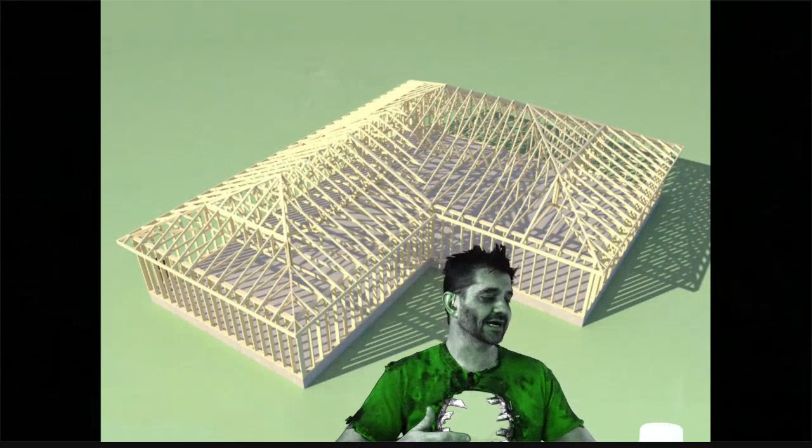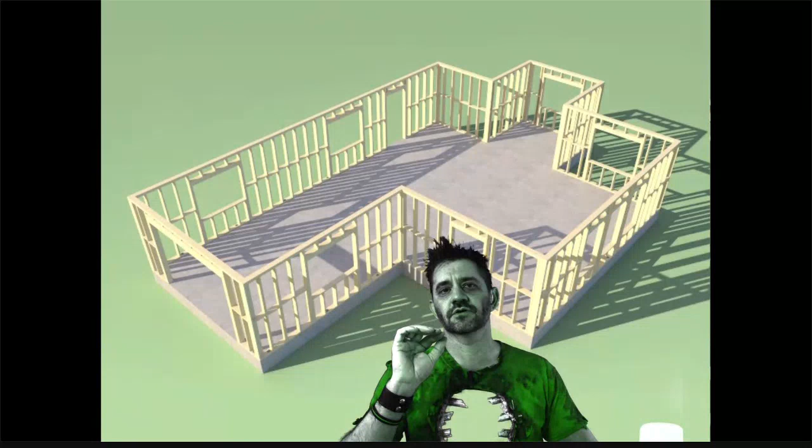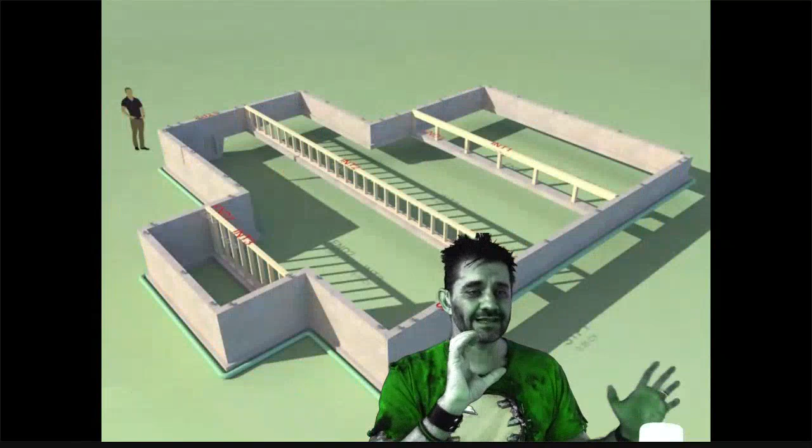Medeek is a series of extensions offered by Nathaniel Wilkerson, who I think is on here somewhere - say hi, Nathaniel. Medeek BIM is a super quick, super easy way to draw the framing members in your house. There's a truss extension, a wall extension, and a foundation extension that allow you to create the framing of your structure in just a few clicks rather than lots of clicks. This is something way beyond just downloading a component and dropping it in - this is an extension that goes in and frames all the stuff for you.

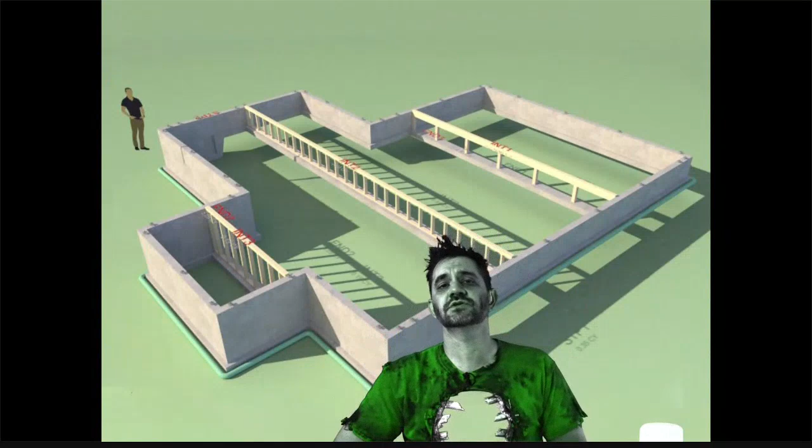I wonder if John Brock uses Medeek. What do you think? I know that those two get along quite well.

Speaking of awesome, you know who else is awesome? Our Fireside Chat SketchUppers who have joined us here tonight. What kind of costume did you have planned to wear for Halloween? If you're opting out, it's okay to say what you wanted to do this year, that's an acceptable presentation. I'm going to type mine in - I just put Negan again. It's about all I can do these days. Thanks to Jody for letting me borrow his squeaky jacket here. Can you hear this? Listen, can you hear that? I sound like a creaky door. Hopefully that's not my elbows actually making that sound. But Jody's going as Aang.

That'll be fun. Ooh, Indy, I love that, that's a solid one. Oh, got a Day of the Dead one, Nicole, that'll be good. Yes, some sugar skull makeup. I know, see this is the contradiction, right? We just asked you and more than half of you said you're not doing anything, and then we said, 'Oh cool, what are you dressing up as when you do nothing?' What had you planned on? Aubrey did Belle from Beauty and the Beast, right? Is that the right one? Yeah, very cool stuff. Not a lot of extensions, not a lot of costumes out there.

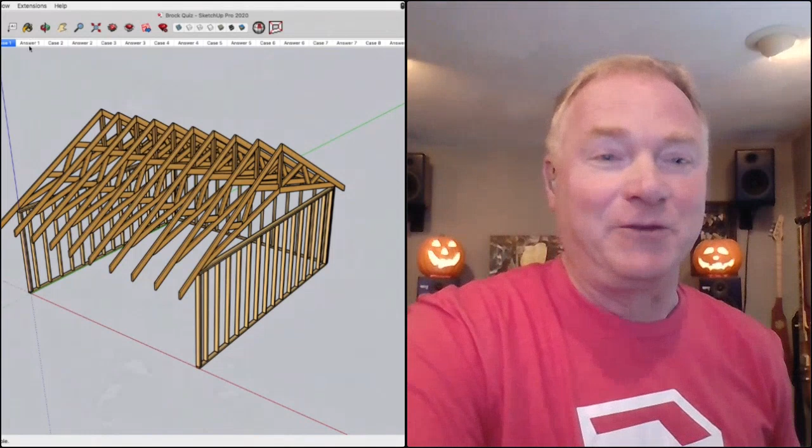All right, we're going to start with some trusses. So you see a model like this - what's the problem here, John? You're missing a sky hook - support from above, trusses. Yeah, that is correct. Trusses, in general, should have at least 2 bearing points. That's right, that's not going to work.

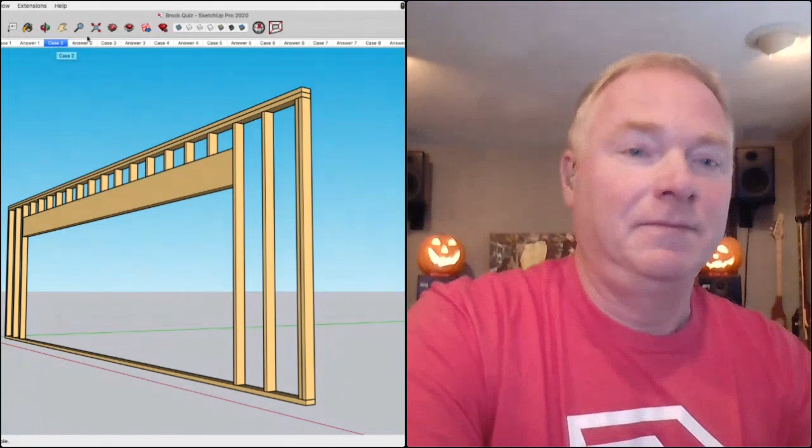Okay, moving forward. Here I got a nice big garage door header, about 16 feet across there. You see anything wrong with this issue? There are no jack studs. That is also correct. Much like trusses, it is good to have headers get supported as well.

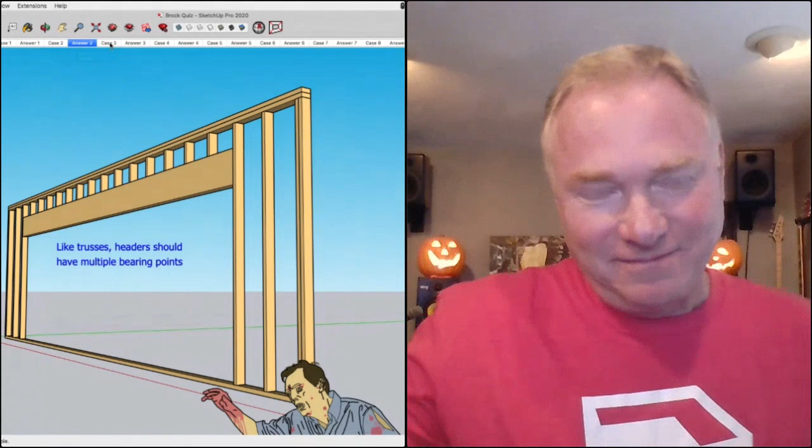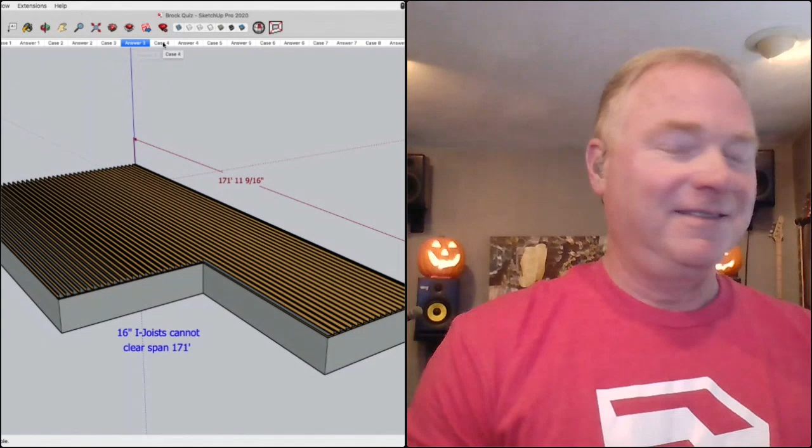Okay, moving springy, yes that's right. A couple people called that out as having no rim board. That would be an issue also, but my mind went to the span first. I would have a bigger issue with shipping that 171-foot I-joist probably before I worried about getting the rim joist on there.

All right, here we have a cantilever condition, and I wouldn't doubt if you've actually seen this because I've seen this in plans before. What's not good about this? If you flip that other way around, you got to be at least twice, if not 4 times, more in than you are out, and they've got it the other way around. That is absolutely correct. The back span should be at least twice the actual cantilever length.

I'm surprised that that is still a thing that gets called out by people. But all right.

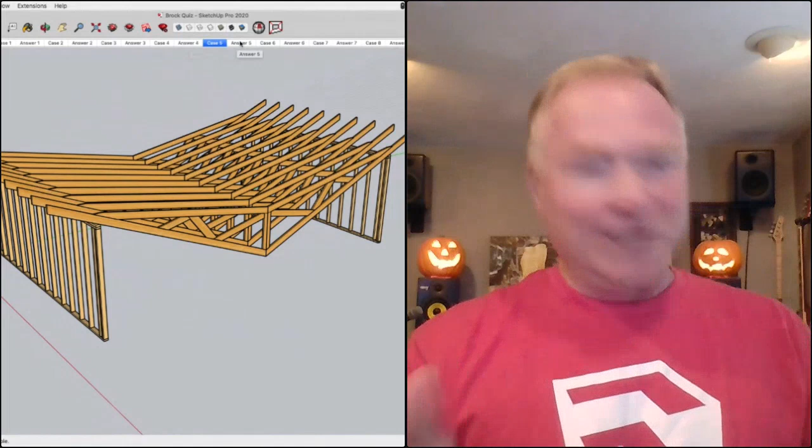That's what trusses look like when we used to install them before we had cranes. Literally, you'd set one up on either end of the plate like that, and you'd take a big long 2x4 with another 2x4 tacked to it, push it up to get it vertical, but they're upside down. That is right, the general rule of thumb I was taught with trusses is pointy side up. Nice, all right, you're doing good, I think you're 5 for 5 so far, John.

I'm sold on your deliverable, but let's grab a couple more questions and just see. Okay, here we have

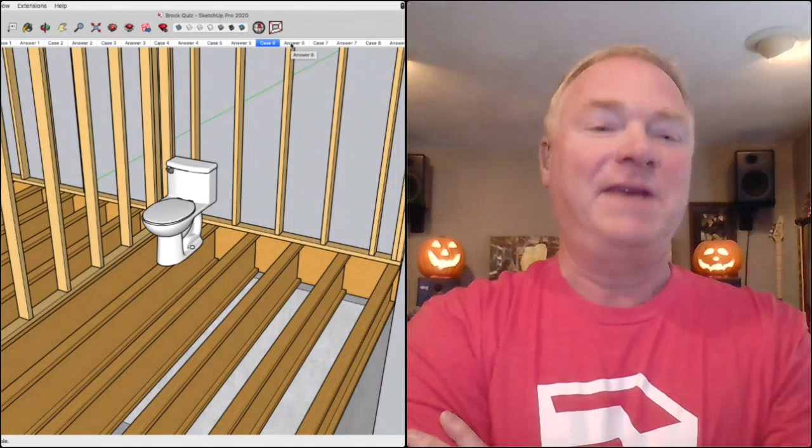What could be a potential issue for the plumber? What do you see here? You can't cut an I-joist or a truss if there's a toilet above it like that. It has to be headed off or engineered if you do any kind of cutting. So that is true. Also, you should put the toilet in after the sheathing and not before. Yeah, pretty much.

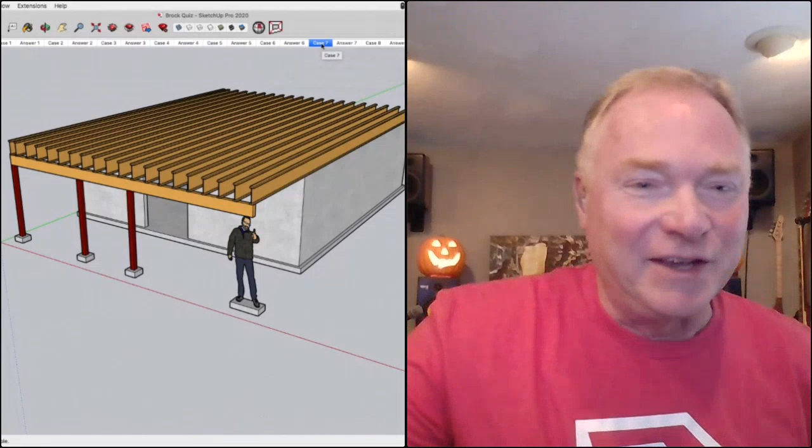All right, what is the problem with this floor system? Is that Guz trying to hold up the other end of that beam? That is right, I could do it for a little while. The problem is a Guz can only be used as interior bearing, he's not rated for exterior support. Mm-hmm, all right, and here we go.

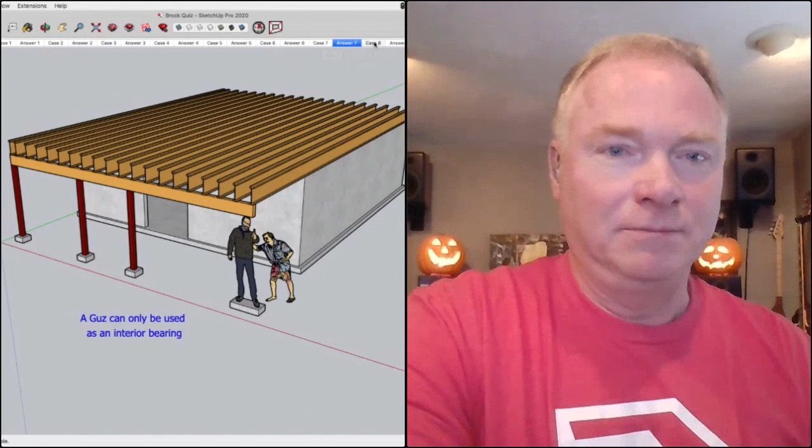This is going to be our 8th and final question. What is wrong with this structure? What is right with it? Boom! Everything is wrong. That is absolutely correct.

Well I gotta say, if I was looking for somebody to review my plans, you've proven it to me. You got the goods, I'm very happy with your answers. Excellent work. Good deal, well that was, you were 8 for 8. I'm very impressed, I'm not surprised though.

And I think we're getting ready to get into the big juicy part of this awesome presentation here. So first, before we do that, let's get some housekeeping out of the way.

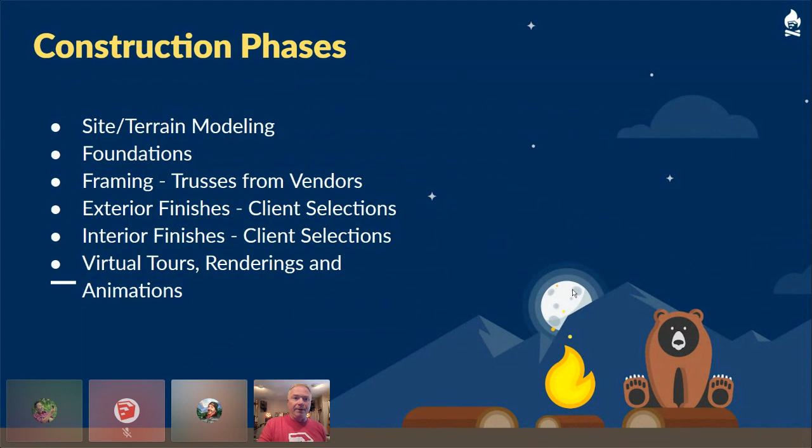Just a little aside, we were talking about the music thing. When COVID first hit—I play in a popular 80s band—everything shut down, all the venues shut down, all of our gigs were canceled, everything pushed into next year at that point. So it started during the quarantines: it was just me on my acoustic, and I'd post a song on Facebook every weekend or whatever. Then I finally started bringing some friends over, and it sort of took off to where past bandmates or current bandmates would come over and we'd do a song and put it on Facebook for everybody. And this one particular episode, a former bandmate wanted to do a Thin Lizzy song, The Boys Are Back in Town—it's his bucket list to sing a Thin Lizzy song in a pub in Ireland.

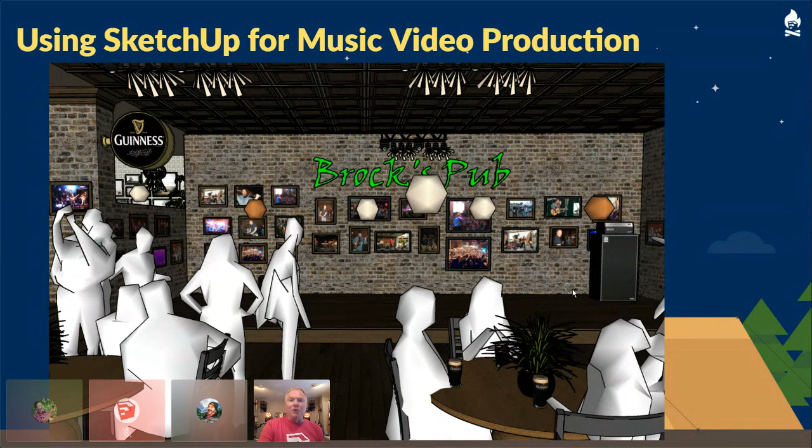So I thought, wouldn't it be cool to have a virtual stage and use our geek skills in SketchUp? So I reached out to my dear friend Dwayne Addy up in Canada, who is Irish, and said, you don't happen to have a pub model laying around, do you? Next morning he sends me this model with this most killer rendering photoreal—the Guinness bottle. So I dirtied it up, threw some brick on the wall and a bunch of photographs and stuff. And that Ampeg amp—Aaron's a bass player, by the way, do you see the Ampeg amp? And there's two Marshall amps on stage that I got off 3D Warehouse. Then I rendered it, did an animation coming in, but then green-screened us in there. So that's us with Brock's Pub.

That's awesome—so everybody came over at different times, that's how we work these things. My other drummer in the current band I'm in now, he'll send me his video and audio tracks, and then I just start building the song from there and having guys come over. It's Brockworks Music if you're interested in checking that out, how we use SketchUp and Inkscape to bring that to life.

It's worth checking out. It's definitely a fun thing to see. Yeah, it's fun. We've been having a blast with it.

So here's the workflow. Excuse me if my throat goes out, it hasn't been in the best shape the last couple days - having that Q-tip stuck up piercing my brain yesterday for a COVID test wasn't fun. All right, so the first thing we do is import our main floor plan.

We don't use a raster image for the floor plan - it needs to be vector-based, something we can snap to and measure. There are some free ways of doing it. I've tried everything under the sun, and finally found a developer to help me make PDF Importer. That's our plugin that's available, and what it does is import a vector-based PDF directly into SketchUp.

But you can also do it for free if you have Inkscape - you can open up that PDF and convert it to a CAD file. You could use Adobe Illustrator, which I used to pay all that money for just to open a PDF and export it as a DWG. That was the only reason I had it, so I saved money by switching to the PDF importer.

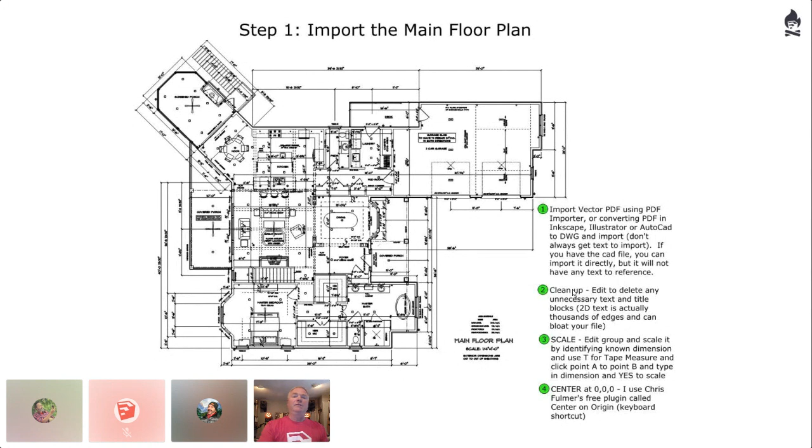I could just move it roughly, but I use Chris Fulmer's free plugin called Center on Origin - shout out to him. For me, it's Alt-C, which takes it and moves it right to the center, putting the floor plan at 0, 0, 0.

The next step is we create what us old carpenters call a storey pole, using guide points. I find a common corner - what you're seeing is a perspective view looking down. Find a common corner to each level in the house. In this case, I used a corner on the interior, on the rear of the house, then go up with a guide point.

That's right where the subfloor will be. I go up with a guide point to whatever the wall heights are, referring to your section drawings and elevations. In this case, 9 feet 1 1/8 up.

I go down 3/4 for subfloor, then down 9 1/4 because I've got a 2x10 band on the truss, mid-chord bearing truss. Then 1.5 inch sill plate, then down 10 feet for the bottom of the foundation, coming up 4 inches because I've got a 4-inch slab. And finally on the back of the house, they're 18-inch floor trusses.

They're mid-chord on the front, bottom chord on the back, so I'll come down 18 inches from under the subfloor for the floor trusses. And that gives me my story pole - that's where I know all the elevations need to work out to.

I've locked that in a group with the guide points, but we use guide points and guidelines constantly. Control G is our edit, delete guides shortcut, but that would delete these guides even though they were in a locked group. So I found a free plugin called Locked Guide Saver - I use that instead of edit, delete guides. My shortcut runs that script and deletes all the guides except what's in that locked group. That was pretty cool.

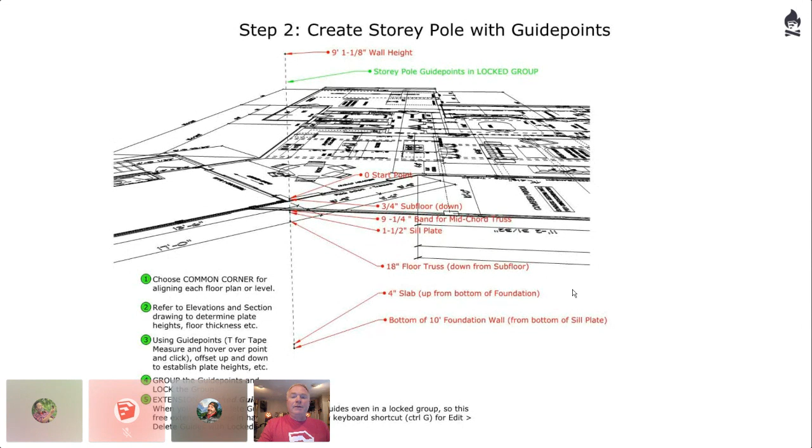All right, the next thing we do is import the other plans. I usually always do that in a clean file, because if you keep importing plans, it can really start bogging things down. So I'll go into a clean file and import it.

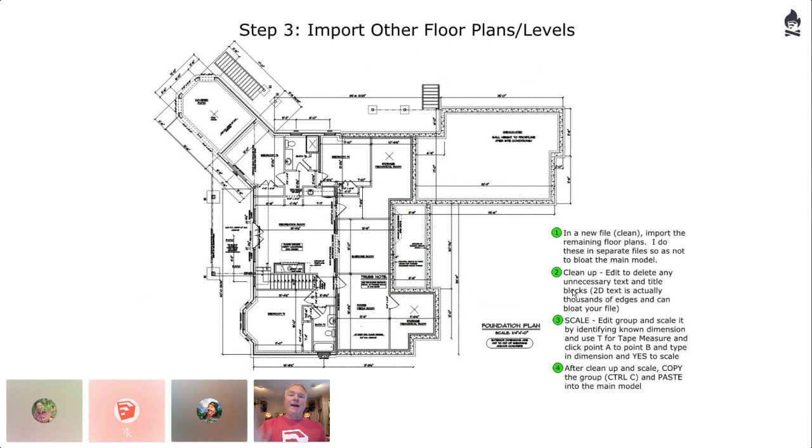In this case, I only had one other level, the lower level. I do the same process by cleaning it up, scaling it, and then I'll copy it and paste it into the main model and move it to where it's supposed to be on that level. In this case, it'd be on top of the slab, so I'll move it to that same exact corner.

And then I usually go top view, parallel projection, and go around the perimeter to make sure that the walls align. Because as Bob McCarter will tell you, there are times where the architect may move a wall on one level and forget to move it on another level. It's happened.

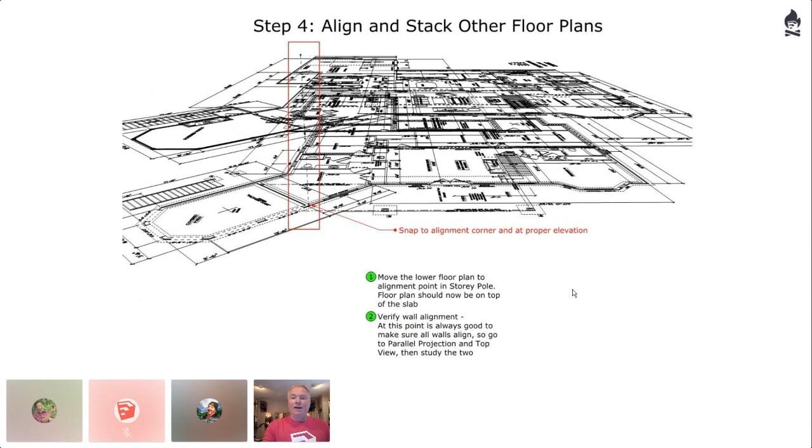So that's how we verify. That's how we got our stack.

Okay, so then it's kind of like what Nick showed with the contours. We work on our site plans and our site models because there's no sense in modeling a foundation with just a simple stepped footing for frost depth or whatever you're doing it for.

If you don't know how your terrain is, you may have some sub foundations to deal with.

So in this case, what you're seeing down here came from my surveyor. They send me a DWG or DXF that has the site or the 2D plat at the bottom. In our case, we're building on a lake where full pond is 795, or contours at 800 feet elevation, is what the property lines are at. The power company owns everything below that. So all these contours are floating 800 feet up above the ground.

Now I think in Nick's case it was like 6,000 feet or something, and so he moves them down. I generally, just to keep the math easy, keep them at 800, at least at first.

So what I do is you'll see, you want the site plan to have the house located. If it's got the driveway located, roads and stuff, you can actually trace those, use that to create faces that you can then drape on your site, which is really handy for sidewalks and things like that.

But you also want it to have the elevation specified for where the finished floor is going to be, whether it's the main floor, usually the slab elevation.

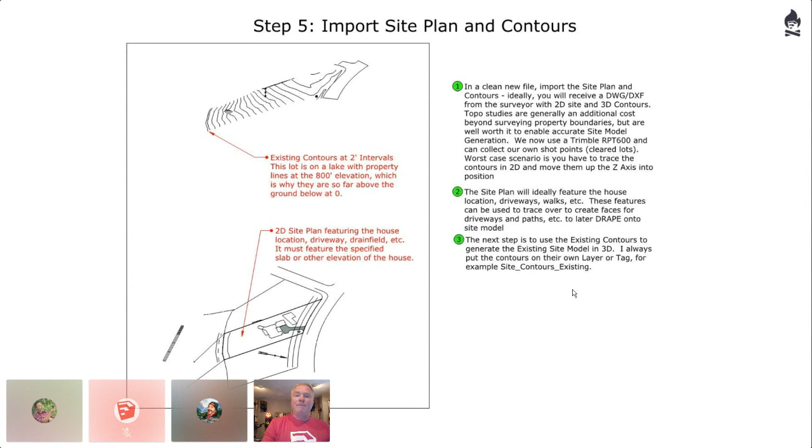So what you're seeing is these contours that are 2 feet apart, and they're just lines, right? So the first thing I have to do is actually make a site plan or site model, and it's got to be in 3D. It has to report as a volume, so it has to be a solid. You can't just do a mesh if you want to know what your cut and fill is going to be, which is very important to us.

So in this case I use Fredo's Topo Shaper, which is a free extension, but it doesn't make a solid right away. It'll put that skirt on there, but you have to actually edit it to make that a solid.

Lately I've been using Christina Eneroth's Terrain Volume, which is a free plugin. So you can use it from contours to take those contour lines to create the 3D mesh, and then run her script, and it makes a perfect solid chunk that reports a volume.

All right, so once I have that existing site modeled, it's important that I take the site into the main model and align it with the house, the main model. I don't align the house to fit on the site, because you want the house to stay in red and green axes, right? So what I do is I'll take that house you see down on the bottom here.

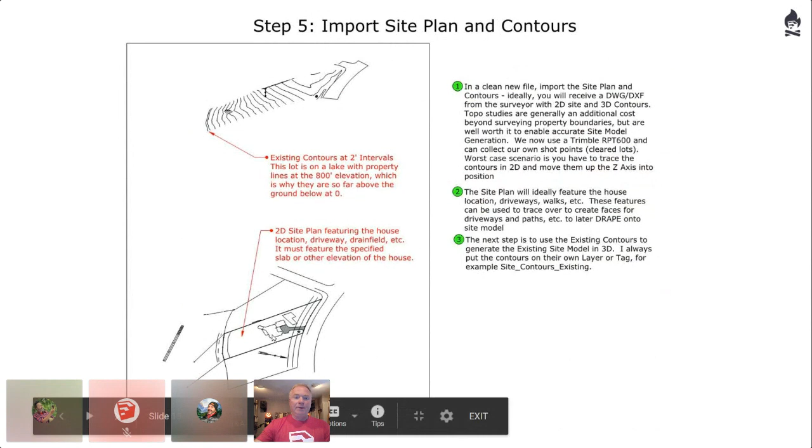I'll take one of the corners from the house and put it onto the basement floor plan in our main model, find a known corner, and then Q to rotate it to align so it stacks to fit perfectly, and then simply take that whole thing.

It was specified at 821.25 feet, which is where the slab elevation was. I just moved it straight down in the blue, 821.25. So you can see the basement floor plan is sticking out of the ground a little bit, and the rest is underground, as you would expect.

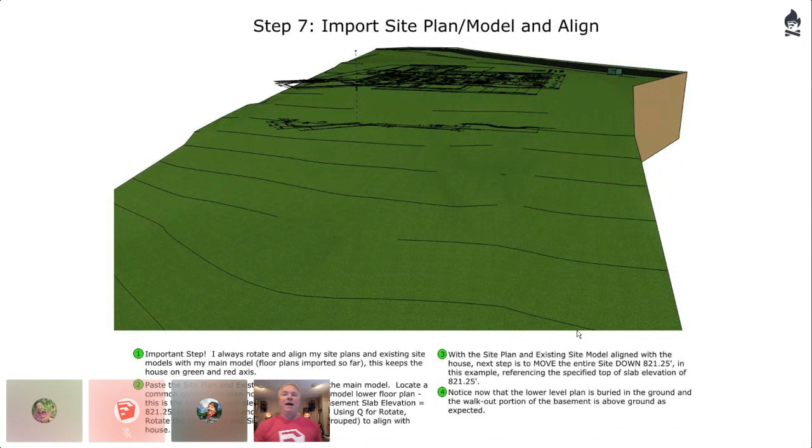And so now we've got the site aligned with the house perfectly. So one of the next steps I do is use a free plugin called Solar North. I think it used to be included, didn't it, Aaron, in SketchUp?

It's always been an extension from the SketchUp team. I thought years ago that it was part of it. But anyways, so I use Solar North if you've got a North arrow on your plan.

I don't use geolocate—I'll use it for a quick test of a house, or if I haven't got topos yet. But once I have good firm topos from the surveyor, or we generate them ourselves, we now have an RPT 600, so we can go out and get our own shot points and create our own topography, as long as it's a cleared lot.

We set Solar North by simply using the middle tool—I pick the south end of the arrow and click to the north end of the arrow, and then you can toggle Solar North off and on.

We use that so we can do sun studies with the clients later, because we put them into Enscape, and they can use the keyboard to see where the sun's coming in and going—oh, it's going to be right in our eyes at 6 a.m. or 7 a.m. or whatever. So it's a really cool, powerful tool.

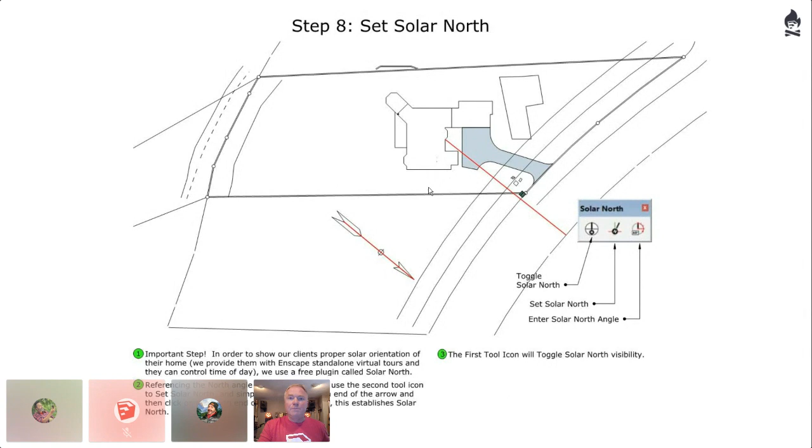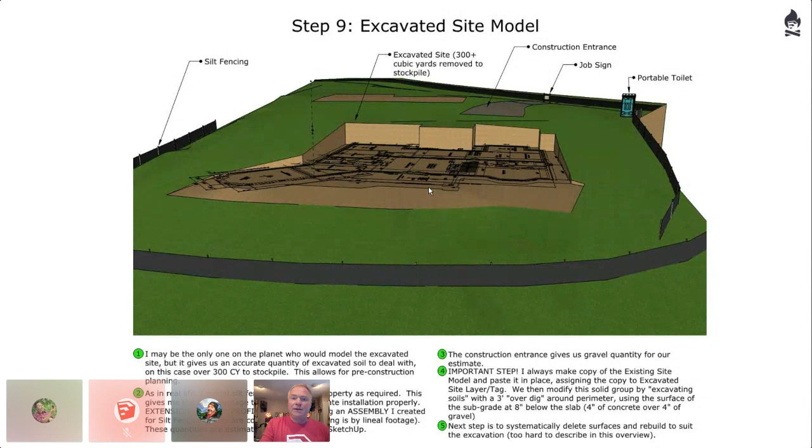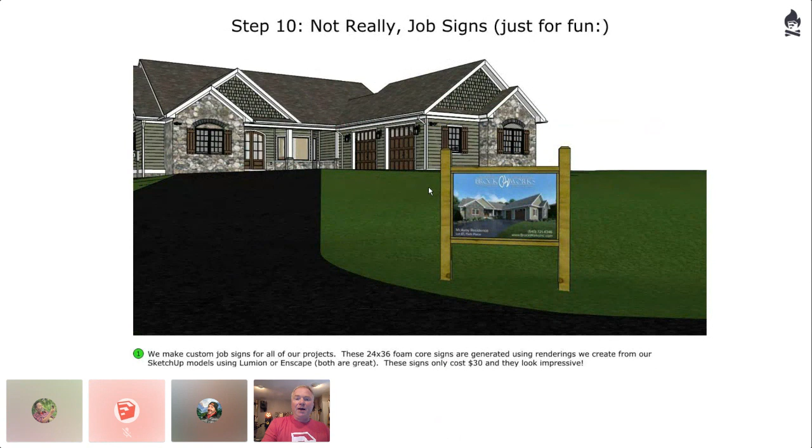This isn't a step in the process, but we actually do job signs for each house—a custom 24 by 36 sign that we post out front. In this case, we're built on a lake. These signs are like $30 foam core signs, 24 by 36.

That was done in Lumion, and we got our job information on there. This one was down by the lake because you get both ways that you can see the house, so we put those up for the people. Usually I get Dwayne Addy to do it because Dwayne is the best rendering guy I've ever met, so we do a lot of work together—sometimes I'll pawn that off on him.

With this excavated site, you can see in this drawing that the foundation wall—I didn't design this one, the architect stopped the foundation wall sort of midway—but you can see that's well underground, and unless you're going to use retaining walls, we needed to extend the concrete down.

I caught this when I model these houses to estimate them. I was able to know that my foundation needed to be extended, versus finding out in the field that I was going to have to do that. So that really comes in handy.

All this is a 3-foot over dig around the perimeter. If you've ever done site modeling, I basically take the existing site, copy it, and paste it in place immediately. While it's still selected, I change that from my site-existing to my site-excavated layer—so it's 2 copies of the same thing. I turn off the existing site, then modify the excavated site to suit my needs. You basically turn on hidden geometry and delete the surface you're going to disturb, then build it back up. It's way too complicated to discuss in this one, but I am working on a full video series.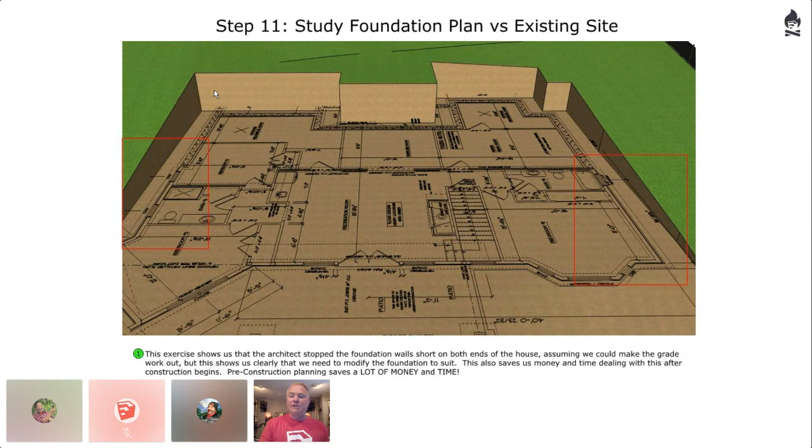Now that I have a new superintendent that I just hired this week, it's going to get me back in the office. I'm working on a full video series on how to build a house in SketchUp, not just from the book. So this would be a step-by-step video.

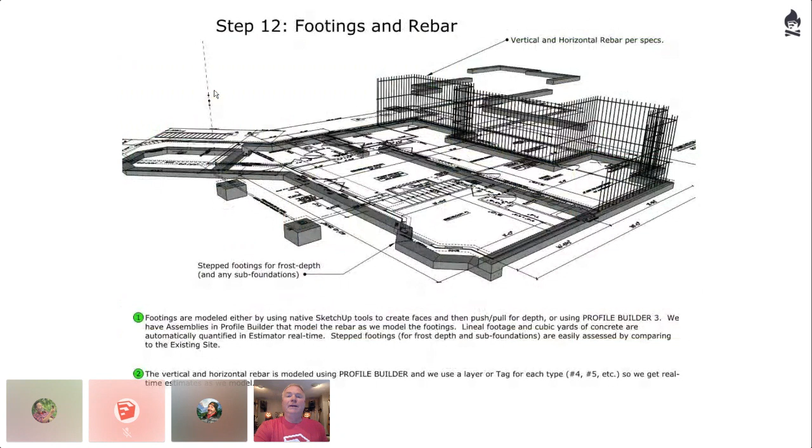I use either native SketchUp tools or Profile Builder to model the footings. Now that we're doing this stuff for guys around the country, we're getting into a lot of crazy different footing sizes and piers built into the footings where the parametric stuff really just is too hard to work with. I really need to work with Nathaniel on his. We're going to be talking after this. But there's still some things where parametric just doesn't get it perfectly, and I got to do it the old-fashioned way.

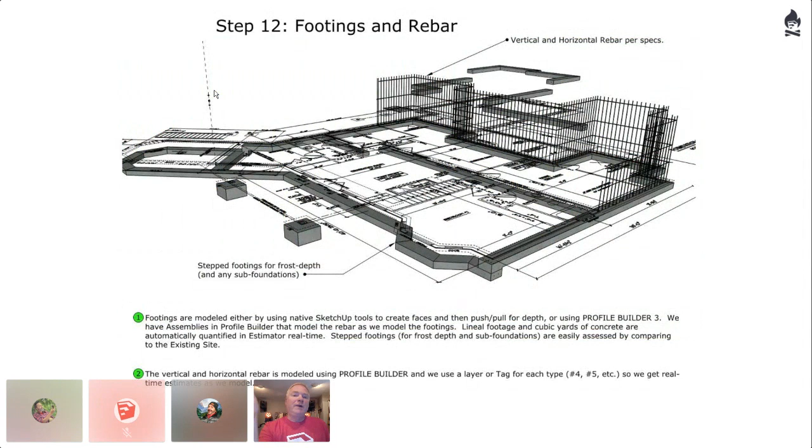In this case, I use Profile Builder for my footings, and I use an assembly that's got my rebar already in it, so there's 2 runs of rebar in it. All the rebar that you see, I modeled using Profile Builder, just the one piece, and then moved it around, or the horizontals I just traced around. This not only is how I have to build it, and my guys see what they have to do, I've got my real-time quantities in Estimator, which is priceless.

Foundation walls - some people may have seen this Profile Builder assembly I did years and years ago. That one assembly in Profile Builder, just by tracing the perimeter, will give me my footing with 2 runs of rebar in it, my foundation wall with expansion joint on the inside, waterproofing on the outside, drain tile and drain tile gravel, a sill plate that's sitting a half inch in so sheathing can flush out, and then anchor bolts within 1 foot from the end and 6 foot on center. All that from just tracing one simple path.

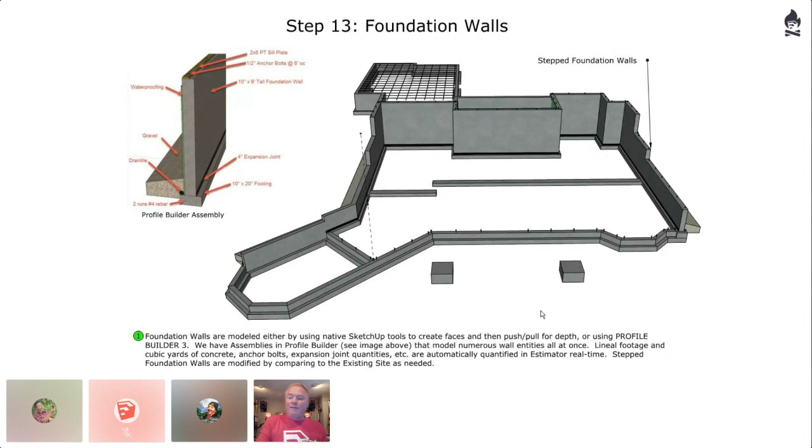So if it's a simple foundation, this works well. In this case, I had some stepped walls, so I have to modify those. I know that Medeek's got a way of editing his walls now that will allow for these steps. Once we got our foundation in, I put it back into that existing site just to make sure those steps worked out right as a verification.

Slab prep - I put the gravel underneath the basement slab, and we'll put the foam insulation. Again, that's a profile in Profile Builder that as I trace it around, it's a once and done thing, and it automatically goes into my budget.

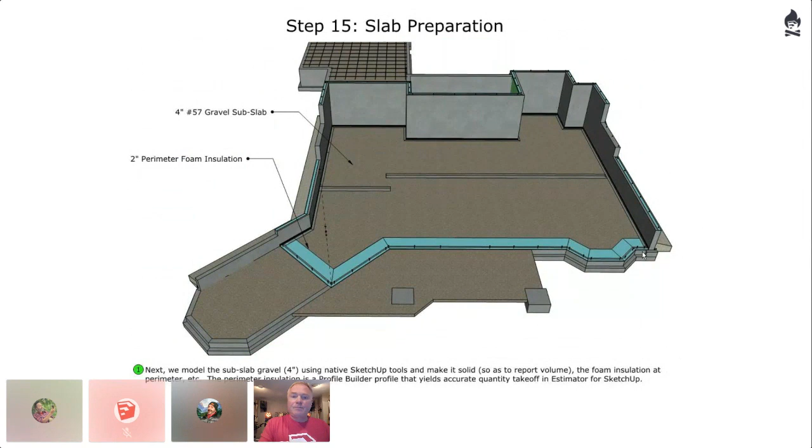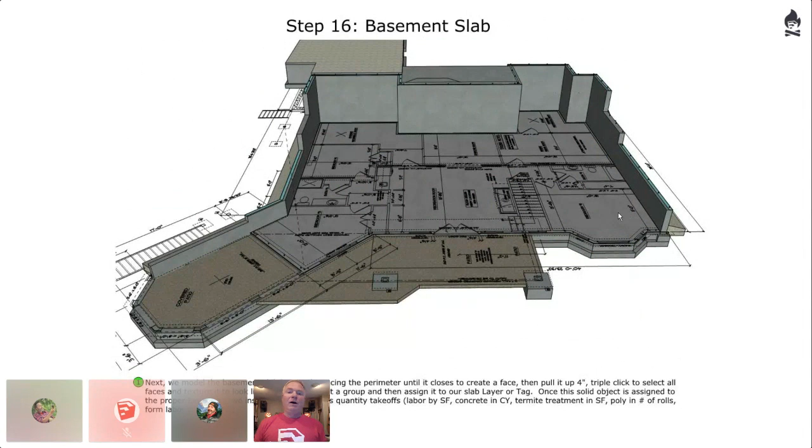Basement slab - I've got a slab tool that comes with Estimator, where you can simply trace a face going around the perimeter, pull it up 4 inches, make it look like concrete, put it on a group. In my template file, I've got a basement slab layer, or tag now. That simple action of modeling that slab, as soon as I do it, I've got all my costs associated with it in seconds. At this point, I could actually run a report for how much my foundation costs just as I've modeled it.

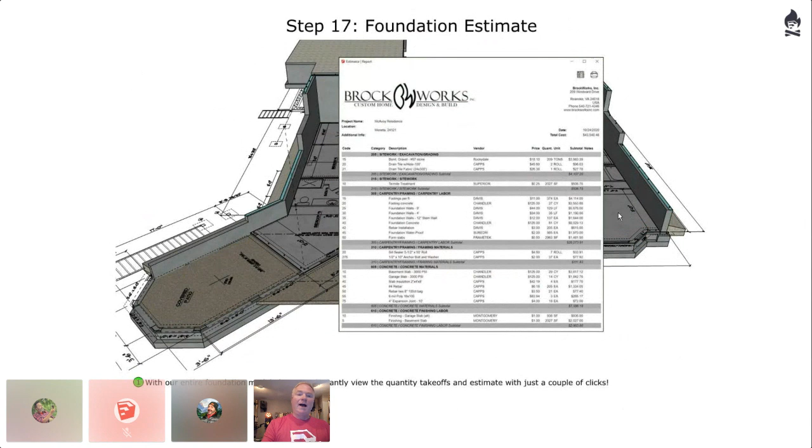I'm not having to go and model something and then go measure stuff off the plans. It's all real time. If I made any changes to that, I just rerun the report because it's a real-time estimate.

So then I frame the wall. In this case, we're framing it right on top of the slab, just like you would in real life, just like you've chalked walls.

Now we use Framer for SketchUp, which is one of our extensions. We're able to use whatever sheathing you want, zip or plywood or OSB or DensGlass. You can make up your own thicknesses and sizes. Any kind of stud size you would want, not metal studs, but any kind of wood studs and plates and headers with whatever configuration.

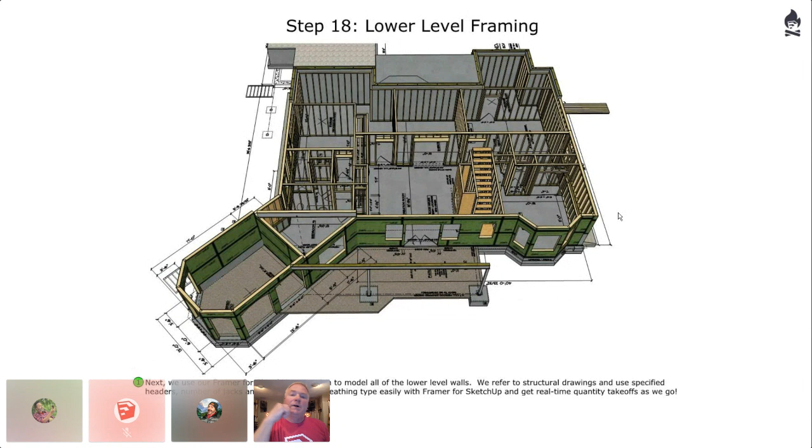In your quiz, Aaron, you mentioned about no jacks in there. So in our plugin, you can say how many king studs you want, which is beside the header, and how many jacks you want. And then again, it all works with Estimator.

So our VDC coordinator will then take that lower level framing package when our superintendent calls and says, hey, I need the first framing pack. He's already got that generated, and that's the purchase order of the materials that's being sent out.

What you're seeing over here off the side is actually wall braces. How am I going to model wall braces, right? How do I get a quantity for that? So I just did a stack of 12-foot 2x4s, 30 of them, because that's about what it takes on a given level, and throw that into the model.

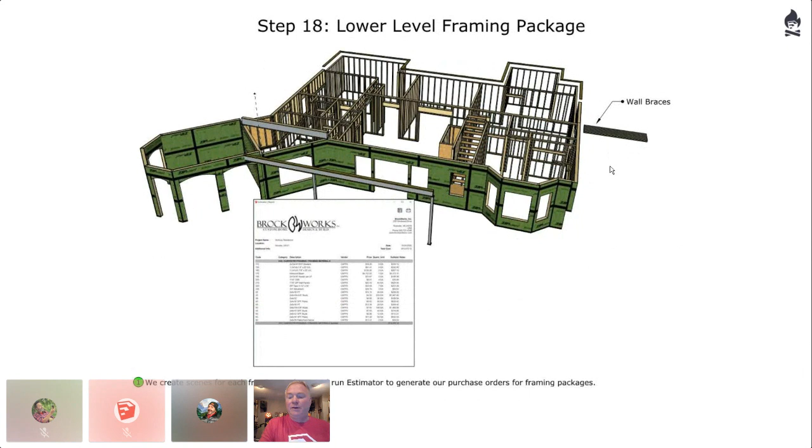So it's not a perfect way of doing it, and I don't know how Revit or any of those other things are going to be that perfect either. It's one of those things where you have to use some judgment. But it's still a huge step in the right direction. It's never going to be perfect, but it's going to be better than the old way. Yeah, you've got to find a place to work with.

So for floor systems, like I said, I use Nathaniel's truss when I'm designing a house to figure out, okay, I've got floor trusses here, roof trusses there. But when it comes down to the actual job, I need to get the actual trusses from the vendor. When they're in something like MiTek, you're in there viewing their 3D trusses. They can do view, save as, and call it floor trusses or roof trusses, whatever, and that gives them a DXF or DWG file that they send us.

Then we basically bring them into SketchUp. We used to have to scale them, but now they seem to come in on scale. They come in as just white, default SketchUp color, so we'll texture them to look like wood, the gang nails to look like gang nails, and then we snap them right on the plate where they go.

Literally it's supposed to start here. And in this case, just like your trivia thing, both ends of the house had toilets sitting on top of trusses, and there was a chimney flue coming up through here that was hitting a truss square on. So this is the second or third revision of the trusses, and I had them correct that. Otherwise that would have been a total nightmare.

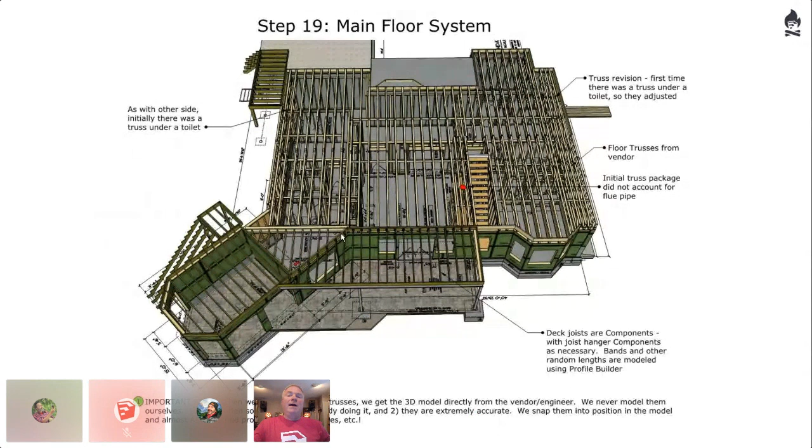Another thing we do is inspecting HVAC systems — I get my technician to come out, and you can see the duct chases aligning here and here. When I first got these, they were all over the map, so we take the time to work with these guys to align the duct chases. We had a system going in this space because we had two zones to deal with, one lower level and one upper level, two systems. So one's going in this storage room, one's going in that storage room. We're figuring out how to get it all up in the trusses without dropping ceilings, so he comes over and we plan all this stuff out in advance, which is hugely helpful.

So is that the truss designer who comes over and does that with you? No, that's the HVAC guy. We do pre-construction meetings with all these guys. I get the trusses first, do my evaluation — like the toilets and stuff like that — get them to send me another iteration, and I also look for the duct chases to align.

But then we look at things like, where's the return air going to go? I'm getting really into the weeds — unless you're in construction, you won't know what I'm talking about. But I can't tell you how many times people plan return air ducts after it's already framed, and nobody ever thinks about that stuff, and then you end up with a nightmare or things that are in the way. So by planning all that out, it's hugely helpful.

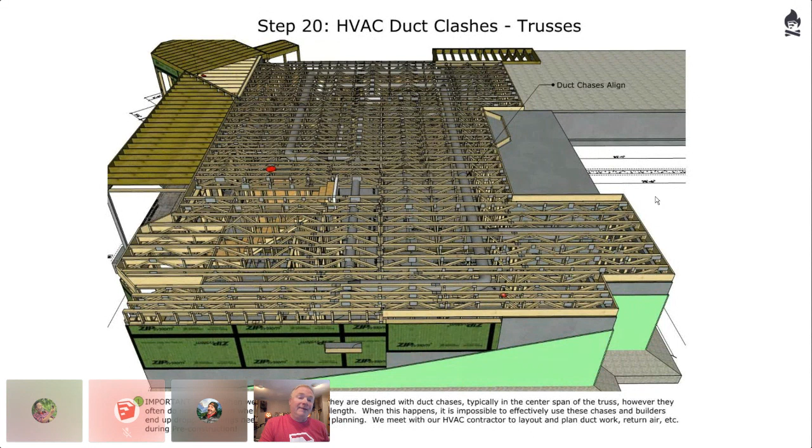Now, a lot of this is common and routine in commercial construction — Revit, clash detection, Navisworks, that stuff is a lot more common there, but it's not in residential. Yeah, until Nathaniel and Bob and the rest of us try to make that thing happen.

All right, so then I put the subfloor down and I cut out the holes for the toilets.

I usually just do main drains, like a toilet or a tub's drain in a certain location, any flue pipes and that sort of thing. So what you're seeing there is essentially as if the slab or chalk lines for the walls are on the subfloor, and you're ready to start framing walls.

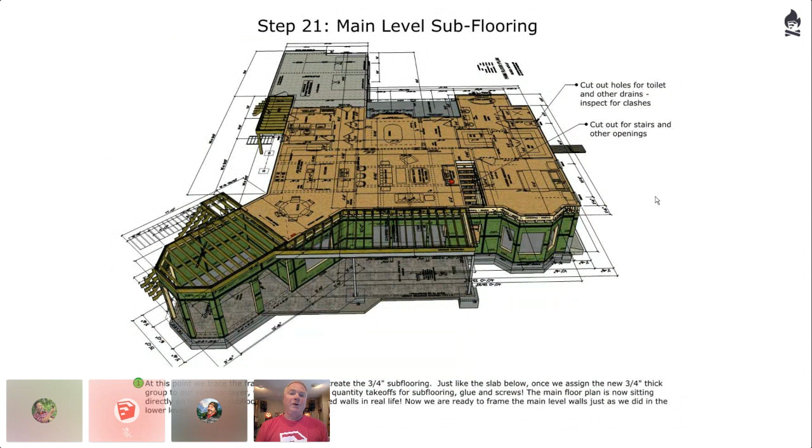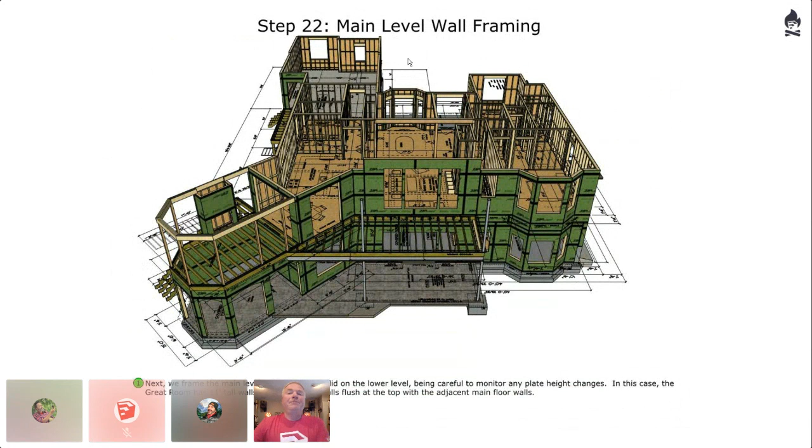So that's when we go in and actually use framer again. In this case, we had a taller wall in the great room, and the garage walls had to align with it. The walls in the front of the garage stepped up because I stick framed that one bay—he wanted a car lift in there. So I modeled that with rafters, found a car lift off the 3D Warehouse plus two little sports cars, stuck them in there, and made sure it all cleared. That's the main level framing.

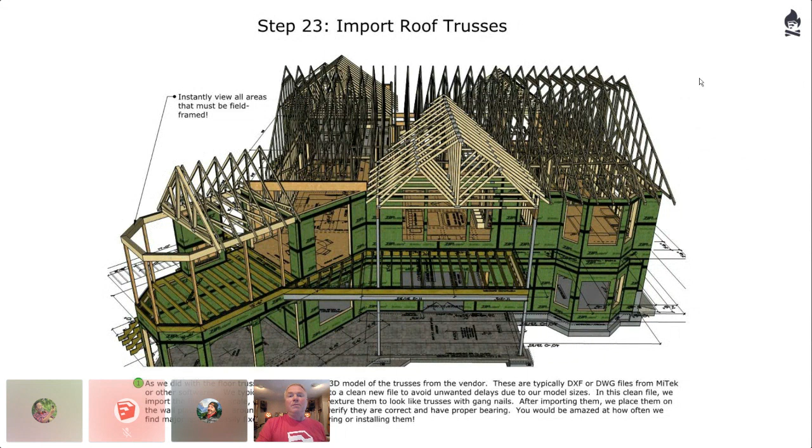Just like we do with floor trusses, we bring in the roof trusses and snap them where they go. As you can see, there are plenty of areas they couldn't truss. A lot of builders just get the truss drawings and think they're good, then they see this and realize they need $1,000 worth of lumber to fill it in. So by getting the trusses first, we can do the field framing on top of that. I go in—this is time consuming.

I know Nathaniel's working on a complex roof tool. There's just no easy way of doing a roof—this slows us down more than anything. I've seen a lot of parametric stuff and it's maybe just not perfect. It looks like it might work, but I need these seat cuts to be exactly how they're going to be, that sort of thing.

So we take the time to model these rafters, valley boards, things like that. It does take some time—hips take a lot more time.

Again, Brightman's rolling his eyes at me because it's that detail—subfascia and stuff like that. I have a profile for all the different roof pitches and subfascia because we bevel cut them, so that's super easy. We just draw that stuff around, and anything I do like that—I'll show you when we get to exterior trim—there are some methods for keeping that efficient.

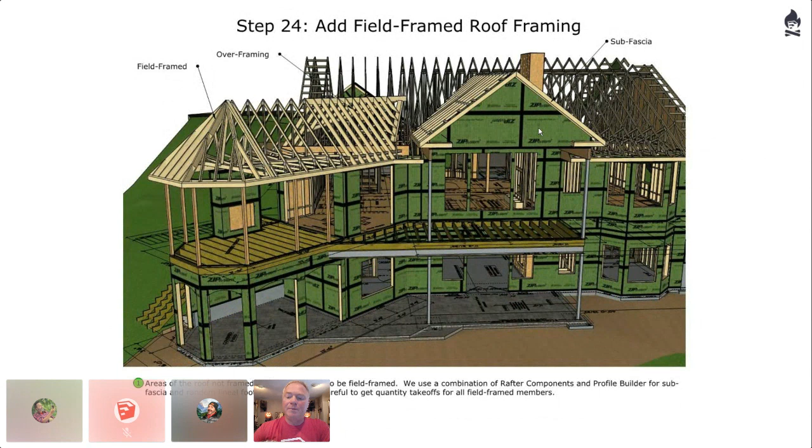Bob and Tyler were just commenting on how beautiful and detailed your work is. Well, thank you—I have to agree.

We try to make it look realistic, and that's what drew me to SketchUp, because I was a SoftPlan guy for a number of years and I really wanted realistic renderings—I was obsessed with that. SketchUp I would use for certain things, like a house with a cathedral ceiling and a barrel-vaulted dormer coming into it. In SoftPlan, creating that ceiling would have taken me a day or two, if it could even do it. So I went into SketchUp and modeled it in about 5 minutes, then imported it into SoftPlan.

I just became obsessed with wanting higher quality renderings and a more realistic look. I like flying around in 3D—I can't stand parallel projection and the whole 2D to 3D back and forth thing. I just live inside of 3D with my 3D mouse, and that's how we see things, right?

We try to make these things look realistic. Like the zip system—I know purists out there are probably giving me crap because these seams are lining up and they never would like this, but I know that. So don't throw crap at me.

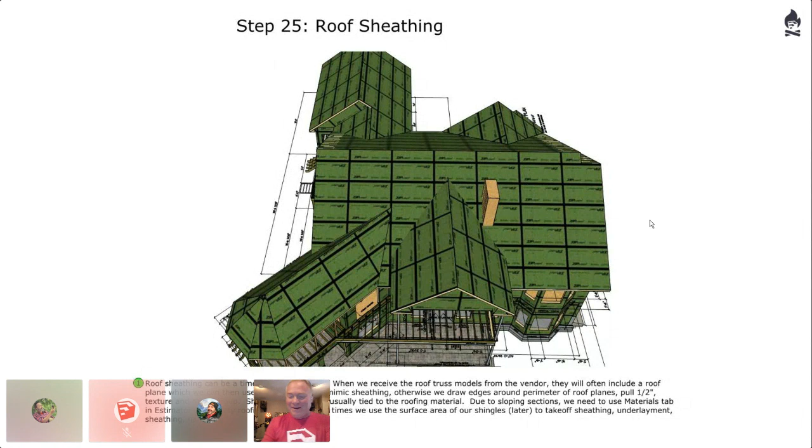I think something you mentioned before is worth repeating, John. You said commercial buildings do this kind of detailed work and it's not a big deal for them, but they're not doing it for residential. The issue is, on a big multi-million-dollar building they justify the upfront design time, but they don't want to do that on a house they're turning around for much less. These steps you and other members of the community are taking are reducing the time they take—every time you do it, it gets quicker, making it easier to offer that advantage on residential structures too.

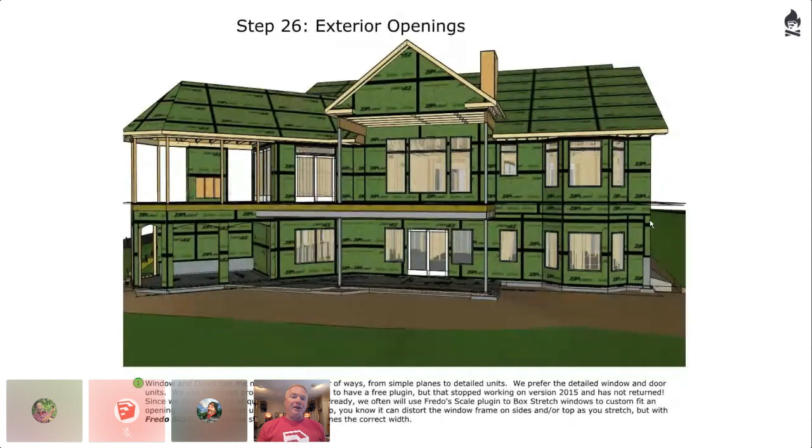Right, absolutely. And then exterior openings—now I used a lot of Andersen windows almost exclusively, and Andersen had a free plugin that I used up until 2015 came out.

And it stopped working, the plugin stopped working, and they kept saying they're going in a different direction. I'm a certified Andersen installer, and I went up there for a training thing and said give me your head computer geek, because I want my SketchUp plugin working so I could do any configuration - a CXW 15 with 6 9/16 jambs, sand tone color, all that stuff. So anyways, I kept a version of 2015 on my desktop until about a year or two ago, and then that stopped working. But anyways, I had so many of these in my library that I've started just using them.

I've started using Fredo Scale. I'll just take one simple casement or a simple double hung - and if Yanni's out there, he's probably going to kill me for this, we'll plug Yanni. We got to talk because I got to make this thing work with your plugin as well. I'll use Fredo Scale and the box stretching, because if you scale one of these windows - say you had a 1-inch frame and scaled it left and right, made it go from 3 feet to 6 foot - your frames get distorted on the sides and stay the same at the top. With Fredo Scale, you can box stretch those to fit perfectly. I use that - I'll take a simple casement and drag it around quickly, because I don't price the windows. I'm anal about all these other things, but the windows I get quoted, so I don't care about pricing every single window in here. So I'll just have them as one big group, and that component gets priced by the quote. But Fredo Scale is a great plugin for making those fit.

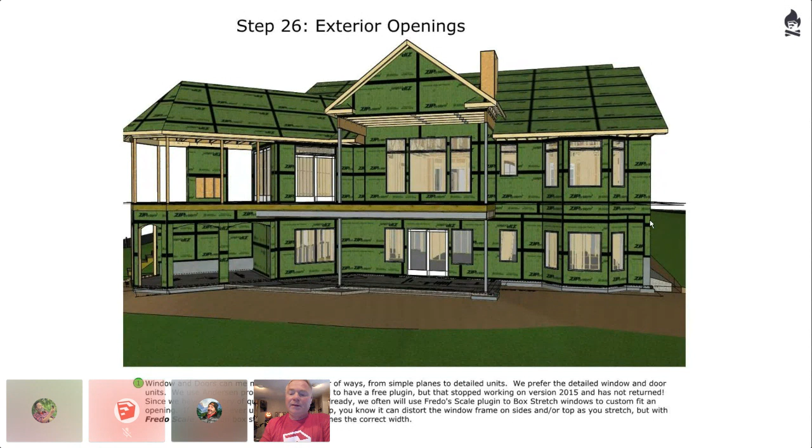Yanni's Flex Tools - definitely check it out. It's got some really cool features, he keeps adding more stuff all the time. So we need to talk, dude. Yeah, Yanni's in the house. I think he heard you. All right, cool, I haven't been able to look at the chat thing.

All right, so exterior trim and siding - I have to model the stuff like I'm going to build it, right? So I can't just mass model the trim. I could, and again Mike's rolling his eyes at me, but I've got like a 5/4 by 10 band here, a 5/4 by 6 frieze board, 5/4 by 4 and 5/4 by 5 corner boards, a 5/4 by 4 band down here. All the window trims are 5/4 by 4, 1 by 8 for my fascias, and soffits are 12-inch Hardie soffit. And then all that stuff has to be done - I do it on individual layers for each one. So in my template, I've got down Z_, so it shoves it way down in the bottom. I've got all my lineal footage of things that I need to take off, so in Profile Builder they're assigned already to my proper layer or tag.

You guys are killing me. Real quick John, we got 10 more minutes. Okay buddy? Okay, I'm cruising.

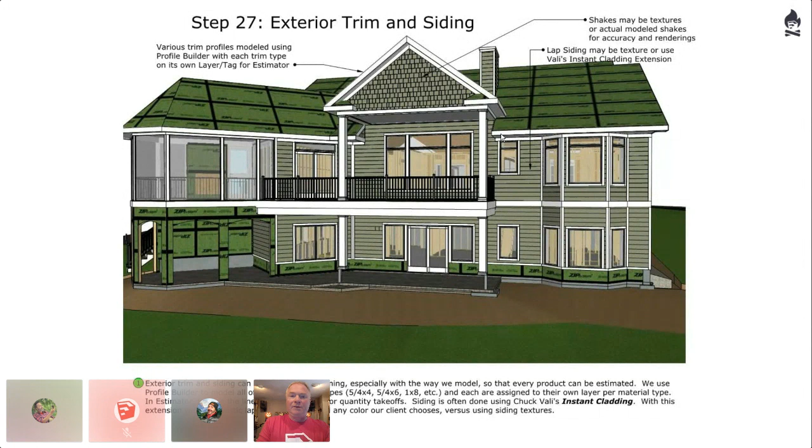Awesome, all right, so what I do is all that trim you're seeing here is in a group - if you were to double click on any piece of that trim, you'd see this wireframe mesh of trim work. But all those are on their own layers or tags, so that estimator is instantly giving me my quantities of all that. And then siding - in this case I used, you could use the siding texture and it'll render really well, but it's kind of hard to match a perfect color. So what I like to do, and it's realistic too, is use Chuck Vali's Instant Cladding, and then I can texture it with whatever color. This was the actual Benjamin Moore color that the homeowner picked out, that you saw in that rendering over there. And the shakes, I wouldn't even tell you how I did those because everybody would roll their eyes at me. And then the shingles, just texture. That's how we get our quantities for roofs, because everything's on an irregular plane, and bounding boxes in SketchUp are not on those planes. So we use the texture inside of SketchUp. All that you see of that surface, you got to be careful to texture it just the one face, right?

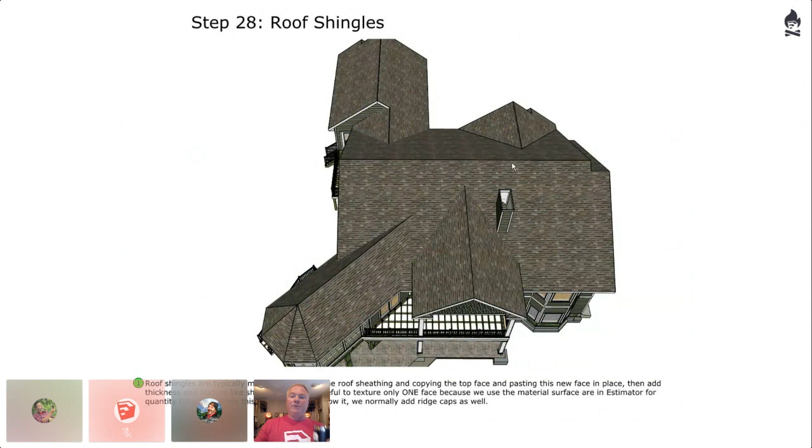The estimator reads that total square footage, and we'll figure our sheathing, our underlayment, our shingles, and everything associated with that. In this case I didn't do ridge caps, but I normally will offset and do ridge caps as well.

Then I'll put the stone veneer on just like I would normally in building the house. These gutters and downspouts are all done using Profile Builder. It's really important to me that gutters don't wrap around a column, because if you just left it to these guys, they'll put them anywhere. So we actually model the gutters and downspouts.

I use a plugin I have called Spin 360, which I don't have out on the market. You go right in the center of the house, pick your center, radiate out to a good viewing angle, tell it how many images you want going around that circle - I usually do about 30. Then it creates 30 scenes that I can batch render in Enscape for good quality, or just export the animation as files instead of an animation video, creating those 30 images that I can stitch together as a 360 spin.

Then I just send that to my gutter guys, stick it up on my server, and send it out to them, and they can spin the house around and go, okay, that's where my downspout's got to go. Anybody can view it from any angle.

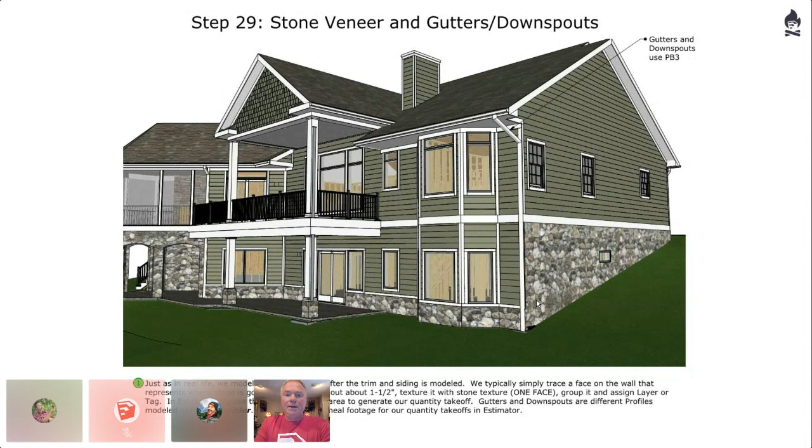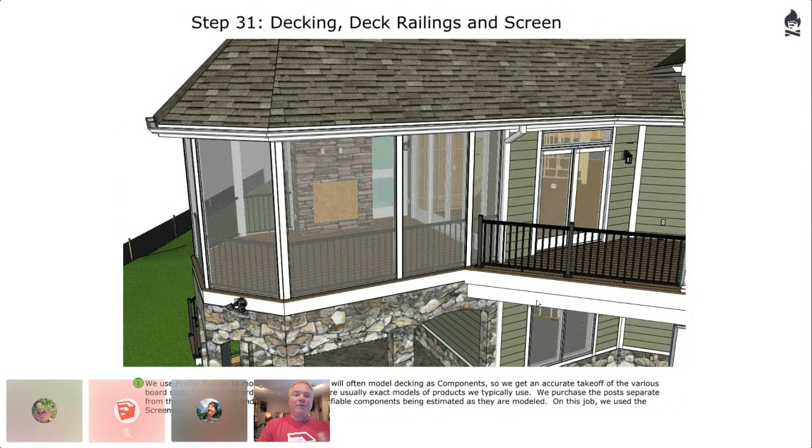We use a Trex rain escape system, so that's in there. Decking using Profile Builder, or I use it to make what would be a component for decking. The railings we have as components in our system, so we get down to using the actual product - this is an RDI Avalon railing system, things that are in our library that I can then get instant purchase orders based off that.

Moving inside, I use these electrical components - somebody came up with these on the warehouse, and I kind of morphed them to be my own - light switches, outlets, they're spaced off a half inch so that when you're rendering, they look realistic as hell. But we put a 2D symbol to them, so as we move them around, we're getting our 2D symbol for our electrical plan.

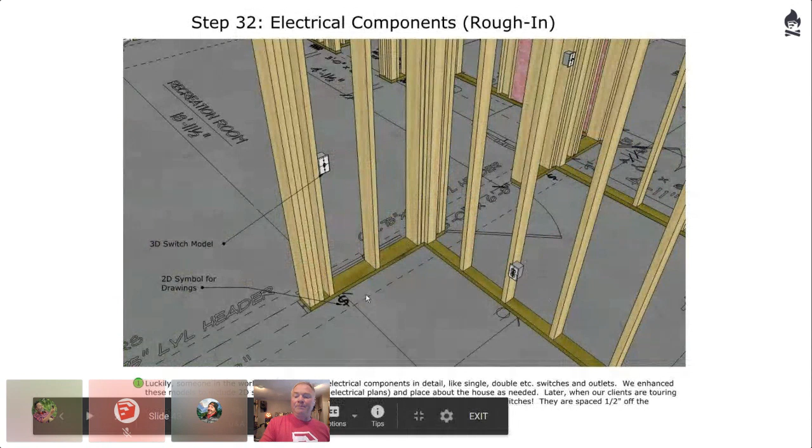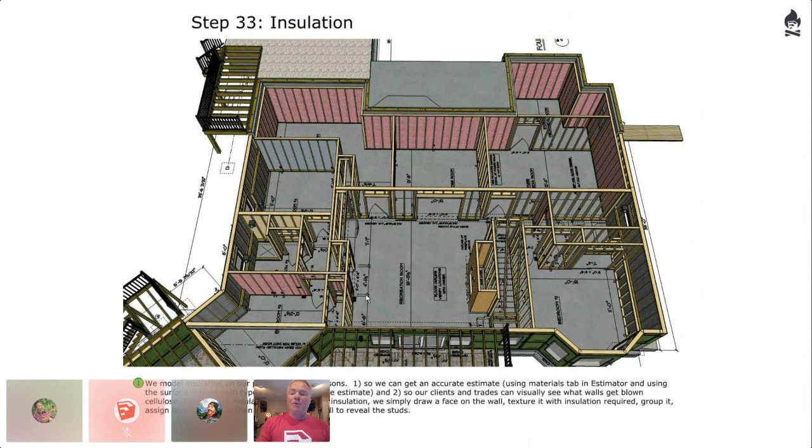We'll add drywall - my plugin and Medeek's plugin will add drywall. I tend to leave the drywall off, and then I'll go back and actually model the drywall in each room. Just by drawing a face half an inch around the perimeter of the plates, I'll set it a half inch, delete that inside face, pull it up, and texture the backside with the texture I have called drywall 48 or drywall 54, because you got to know what size board you're cutting it out of, right?

It depends, so I've got two different ones that I make that judgment call on, but then I texture the inside with the color that the people picked out. I did not pick out these hideous colors - I was just in that house.

The people love it. The cool thing is these people lived in New York while I was building the house, so we did all the colors that they wanted, sent them an Enscape standalone executable, and she's able to walk through her whole house and say, yep, colors look great. So they love it.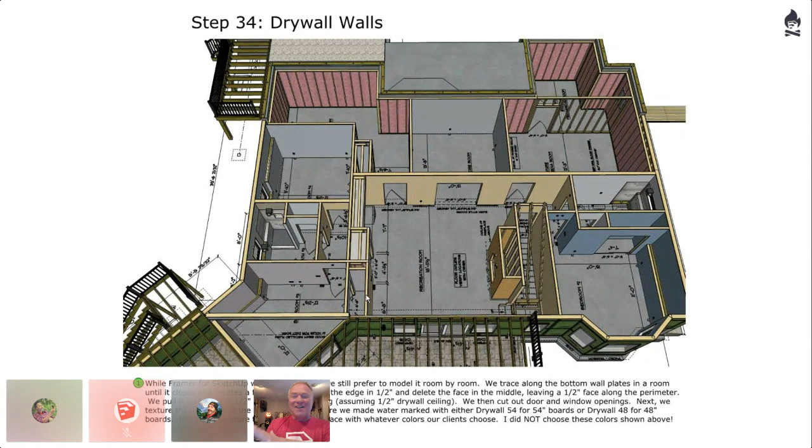That's all that matters. We do the drywall ceilings as well, on a separate layer so we can control visibility. You can see that watermark I got on there, drywall 48, and that gives me all my drywall board count, and it's been really, really accurate on these jobs.

Interior finishes - this is where the model starts to really get bogged down, because we're putting in Kohler toilets that they pick out, the cabinets. Now cabinets, we don't model them ourselves if we don't have to.

Our cabinet guys typically use 2020 or something similar, and they'll export those files usually as a 3ds file. But then we'll bring them in, clean them all up, texture them the way they're supposed to be, and put them in our models.

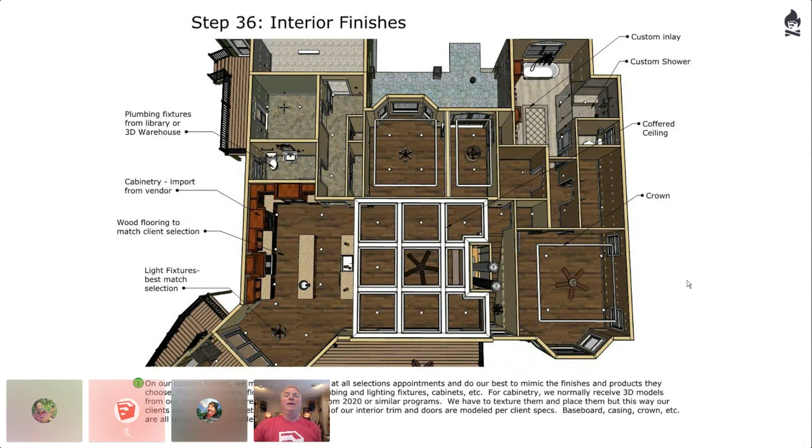That way the client gets to see the exact cabinets, that we're not just making it up. I model all the interior trim the same way as I did on the exterior. They're each their own profile. And as we model it, we're getting our real-time estimate.

We'll do all the floor coverings, whatever they've specified, and try to match the tile as best we can. Like in this case, she had an inlay she wanted in the floor, very specific. We had this custom shower with the pebble floor, the bench, the heavy glass. We literally stuck her in here in Enscape, and she was standing in her shower looking around on the Oculus.

Yeah, that's exactly right, that's what we want. And so when they moved, hopefully... yeah, she was fully clothed. But yeah, we try to match everything as close as possible, because we want to match their expectations.

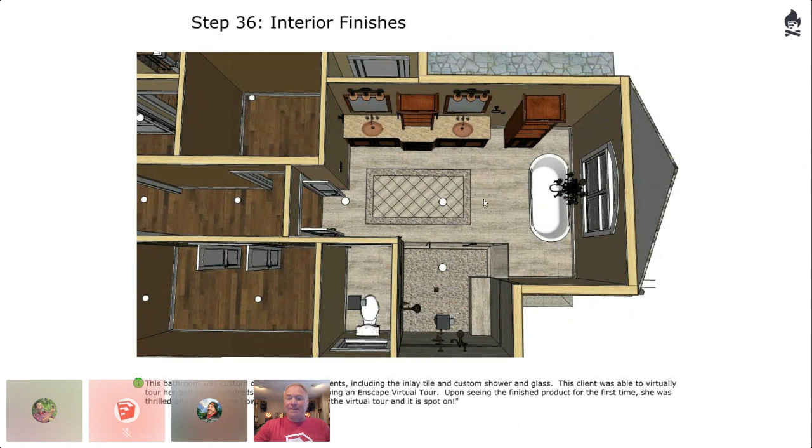So that's all on, and we'll render that out for our job signs and so forth. But then I can select everything, select all, and I've got my full estimate for the house. If they change something or move something, it's going to get changed for us. We don't have to go back into Excel and change something.

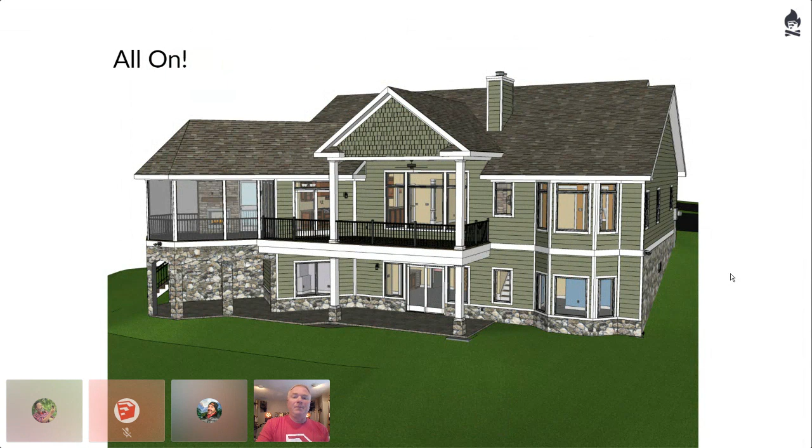Deliverables: renderings, animations, and virtual tours, we use Enscape and Lumion. We're getting more into Enscape now because for interior renderings, I always used Lumion, especially for exteriors and animations. I was doing a huge job for some Canadians, and Dwayne Addy was working with me on that, and he did some interior renderings I thought were Lumion or something better. They were astonishing, he figured out how to do it with Enscape now.

The 360 spins were kind of cool because that's something they can view from any angle, and I can show you guys how to do that. I never put that plugin out on the market, just because it's one more thing to deal with, but it's still pretty cool.

One thing I want to get out is the 360 cameras. I've got an Insta360 1X camera that I take out with a little selfie stick, go to where the center of the great room is, and do the 360 shot, then come back in Enscape and use that as the background. Then I'm showing them the actual view. This isn't a very good rendering because it's one of mine, not one of Dwayne's, and I cranked it out right before this thing.

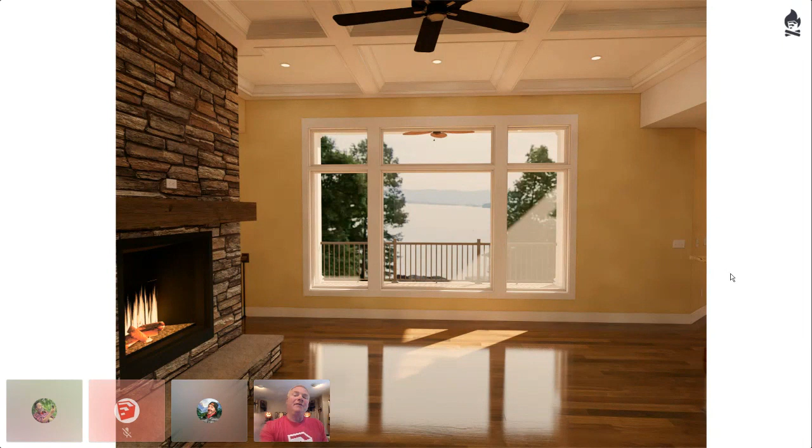So as they're walking around in Enscape, they can see what their view is. It only works if you have a cleared lot, but you want to see something that drops people's jaws, man. That gets the homeowners really jazzed. Yeah, so that's all I got, guys.

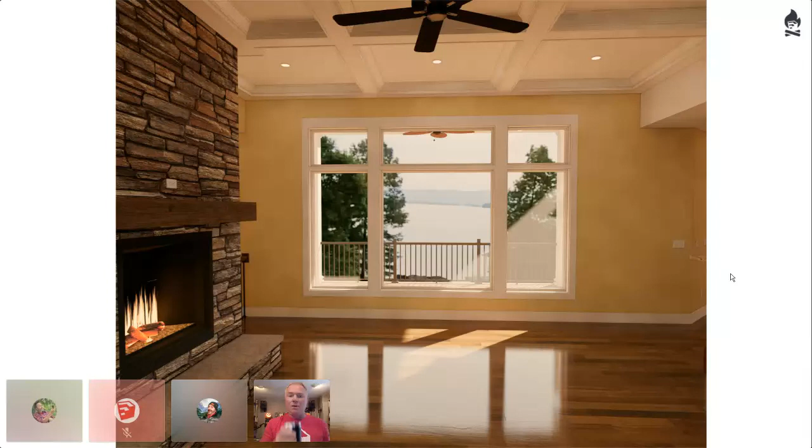Oh, awesome, wow, okay, all right. Well, I mean, I can show you more, but that's it. Let me climb back on stage here, just all that. Yeah, just that. I'm gonna need to watch that four or five times just to... I thought you were going to bring the hook out on me.

So I got a quick question, John, because this is something that plays in my mind. Obviously you've spent a lot of time and energy customizing and arranging this for your workflow. How much of your process do you think people can adopt themselves and customize for their own method of building or location, that sort of thing?

I don't know. I'm hoping more and more people are going to adopt it. The people I talk to, I've got several clients that started out as my customers. They bought the stuff thinking we're going to do this in-house, and then I'll start doing something for them, and they're watching me buzz around. They're like, 'Oh, screw it, I don't have time to learn this stuff, you do it.' It's no different than me trying to code an extension, right? I spent hours trying to do that.

I don't know how Nathan does it, or Tom, Chris Fulmer, Tig, Christina. It's a whole other brain. And I think that's what this is.

It's a certain passion. Obviously you can't shut me up on it, so I'm passionate about it. But a lot more people could do it if they had the resources, and that's what we're trying to get out there slowly.

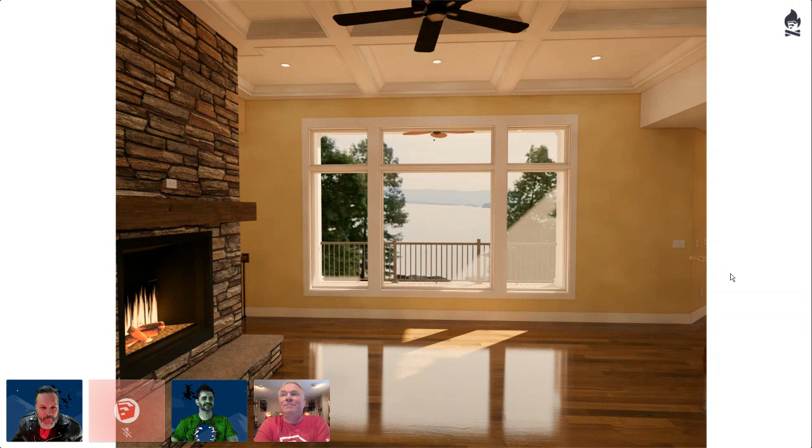That was it. Do you guys remember what that was called? It was one of the early slides. Early on. Okay, let's see here. We get some people. Oh, hey, somebody got it. Tobias? Nice. Tobias got it. Yeah. All right. Awesome. Starting to think nobody was out there.

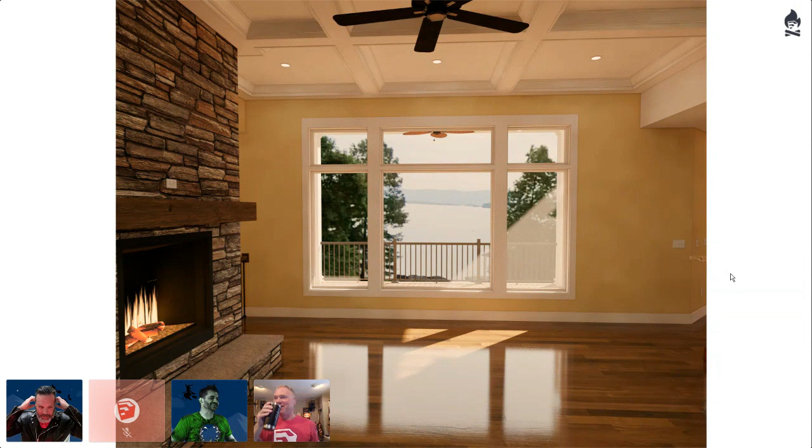Wow, more people followed it than I would have expected. There was so much information in it. That it's amazing that people got it. That's awesome. There is no ADD in this audience, they are just hyper focused. Man, that was awesome. Thank you so much.